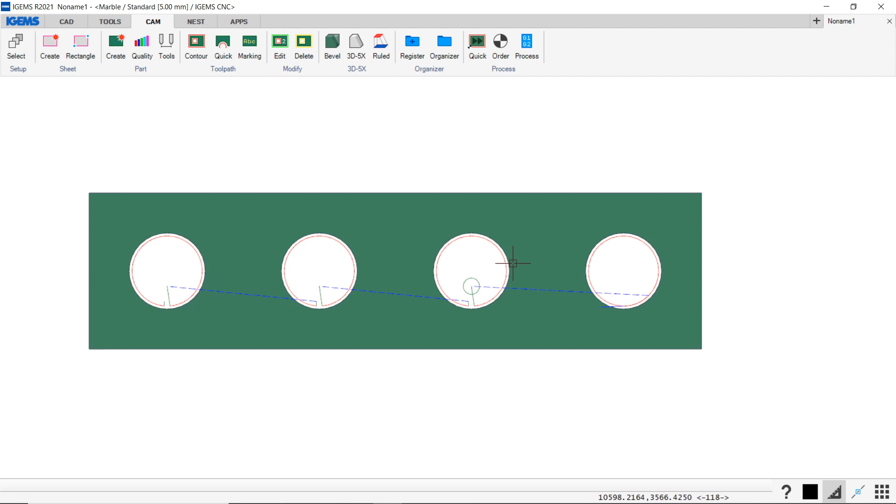So I think a good start is to make some piercings. We're gonna cut in this 25mm aluminum sheet, and I'm just gonna make some piercings right here to display to you what they look like. Before we start the machine, I just wanted to show you the part that we're gonna cut, and it's just 4 regular holes with 4 different piercings on them.

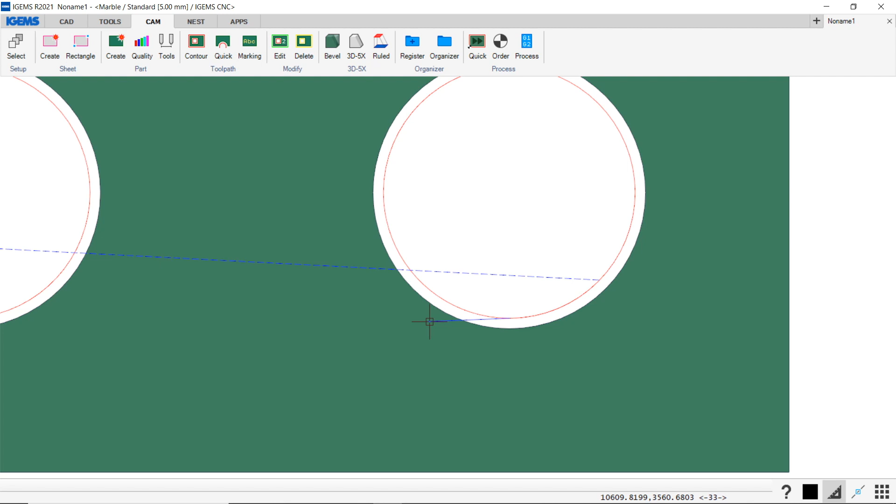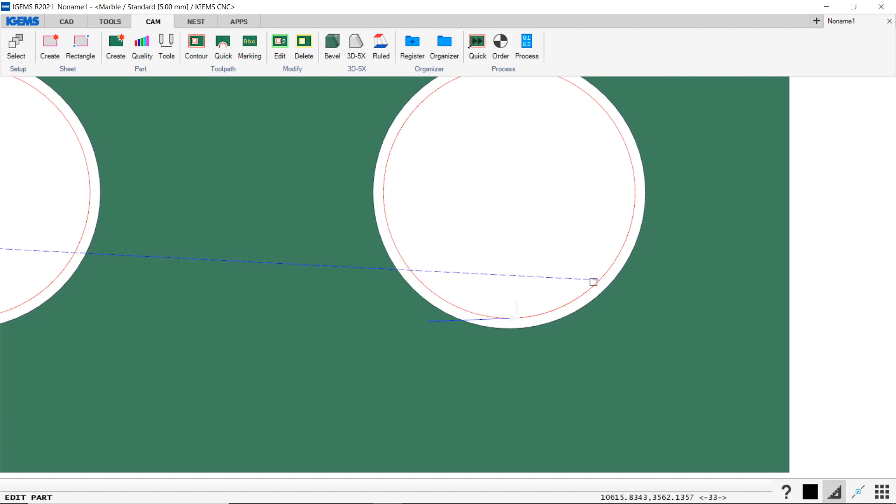And the first one is a blind lead, and the blind lead is used when we cannot fit another type of lead. So maybe it's a tiny hole, and it works like this. The machine goes here and it makes a movement towards the toolpath, and when it hits the toolpath, the jet and the abrasive is turned on, and it travels all the way around and comes here again, and then it will over travel. I think it's 12% of the thickness of the material. So that's this distance right here.

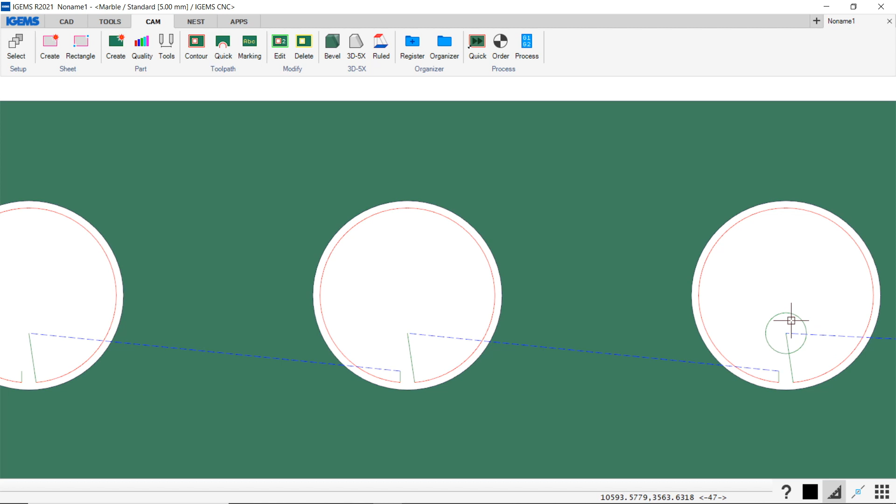The next lead, or the next piercing, is a circular piercing. So the machine will make a circular movement like this, and go in here and go around. And then we have a lead out here as well. Next piercing is a linear piercing. Start here, make a movement with abrasive and the jet on, and go around. So it's basically like a circular piercing but without the circular movement.

And last but not least, we have a stationary piercing, which I recommend you use as little as possible because it takes a lot of time. You will see that in the video. The machine goes here, opens the jet and opens the abrasive, and it will stand here till the jet is through the material. Then it will make a movement.

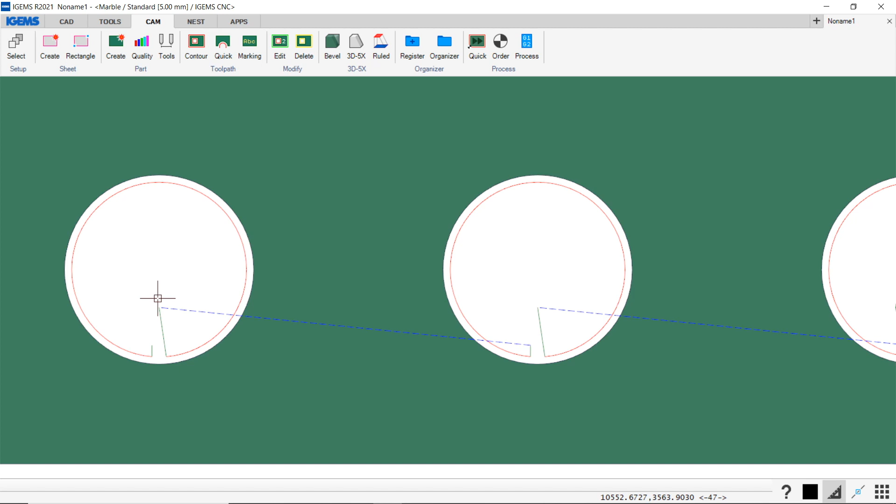And the reason for this being a bad piercing, if you can use another type of piercing that is, it's because it will just stand here, and all the water, all the abrasive that is going into this hole has nowhere to go, as opposed to a linear piercing where it travels, so it can backlash and make a way for the abrasive and water to escape. So that's why it takes a lot of time. I hope that makes sense. But let's look in the machine and see what this looks like.

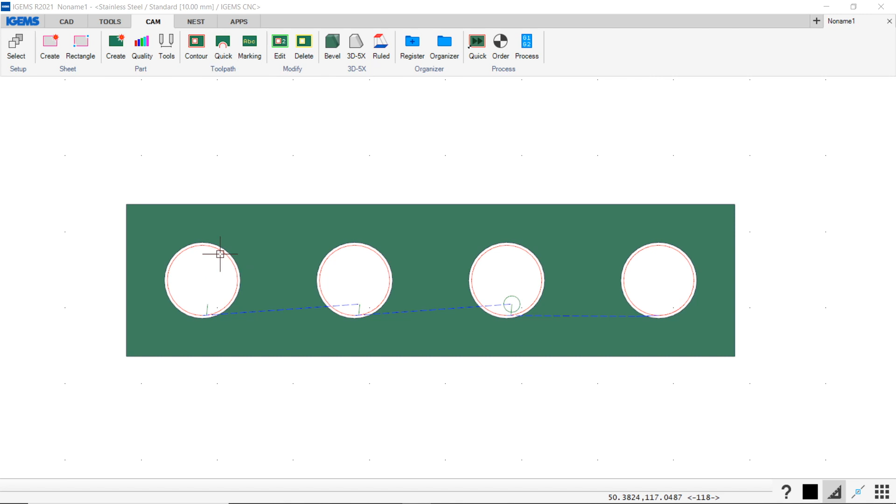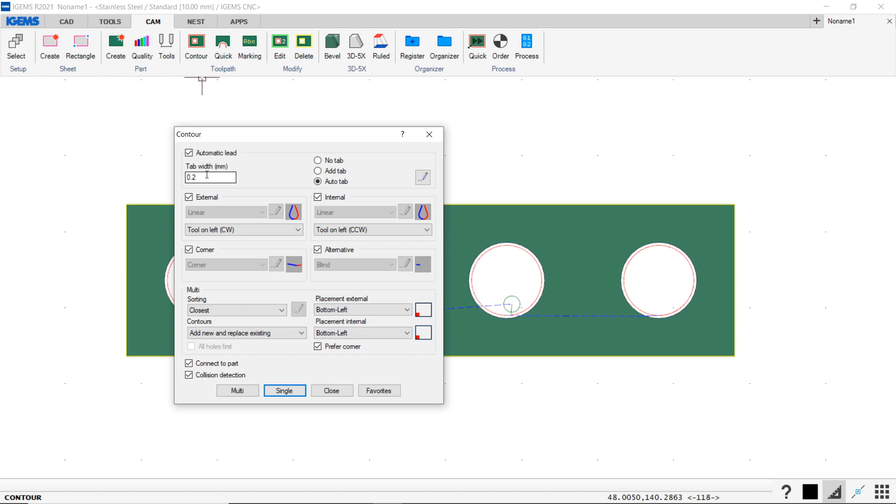Alright, so now you know what our piercings look like. Let's go into the contour and apply these to different types of leads. So I click on contour that's located under our CAM tab, and the first setting you will see is the automatic lead function. And this is a great feature. iGEMS is determining where to place the leads, or actually not where to place the leads, but what types of lead we are putting on the material. And these change for a lot of different materials and thicknesses.

So with this automatic lead, there's one function, and that is if you want to have tabs. A tab is a little bridge, so it will not cut all the way through. It will leave a little bit of a bridge here so that your material doesn't drop into the tank. And that's a good thing when you're cutting small parts, because that's a real pain in the ass when you cut a lot of parts and half of them are falling into the tank.

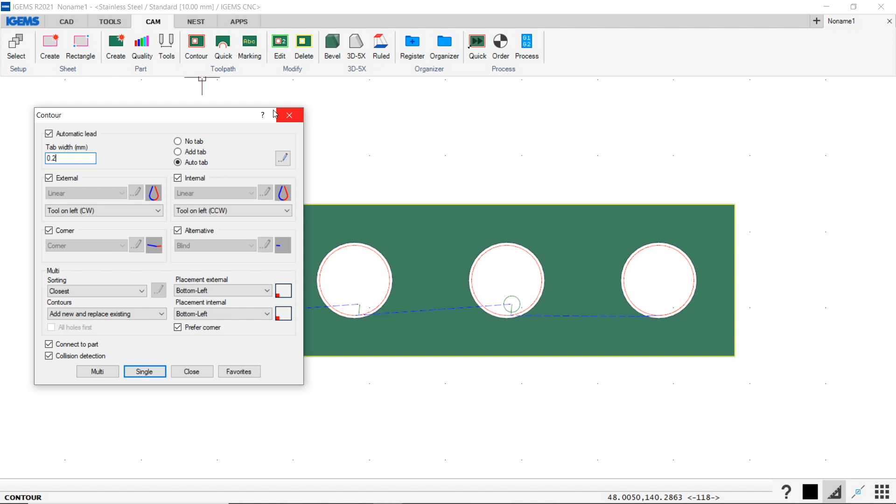So I've prepared this little thing here. So let's say this is your machine table, and your machine table's slots are located horizontally. So your machine table looks like this. And if it does, let me just draw some lines so you understand. So let's say this is your machine table.

Like that. All right, so this part is actually crossing two of the slots on your machine. So this will probably not fall into the tank. And this thing, it doesn't cross any of the supports in your tank. So if we cut all the way around here, this thing will drop into the tank, right?

So let's head into our automatic lead again. We've activated automatic lead, and we want to have an auto tab. So let's just look at these settings. We can set our lead length, 15% of the material thickness. That will almost definitely be enough. So now we can also say add tab on a small X size.

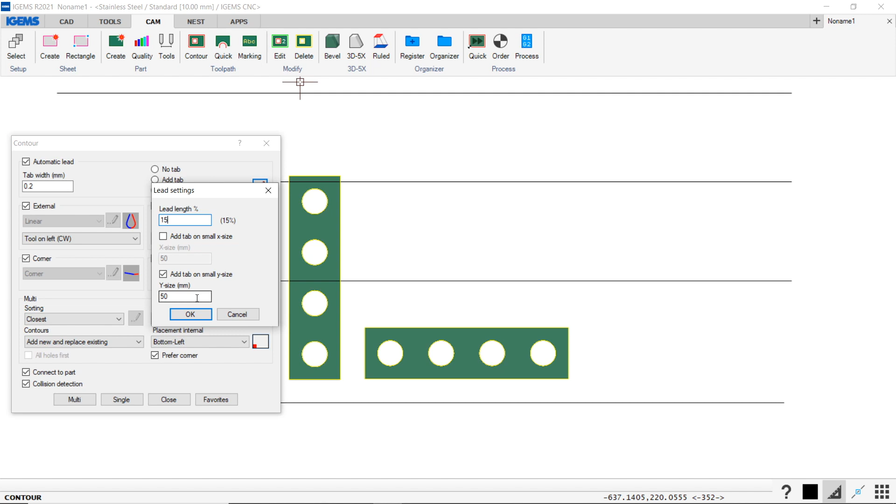And we don't want to add a tab on a small X size. So this is the X size. This already has two supports, right? So we don't have to cover the X size. We have to cover the Y size. So add tab on small Y size. Let's say it's 50 millimeters between here. Then we might want to add a little bit more here, but let's just look at this.

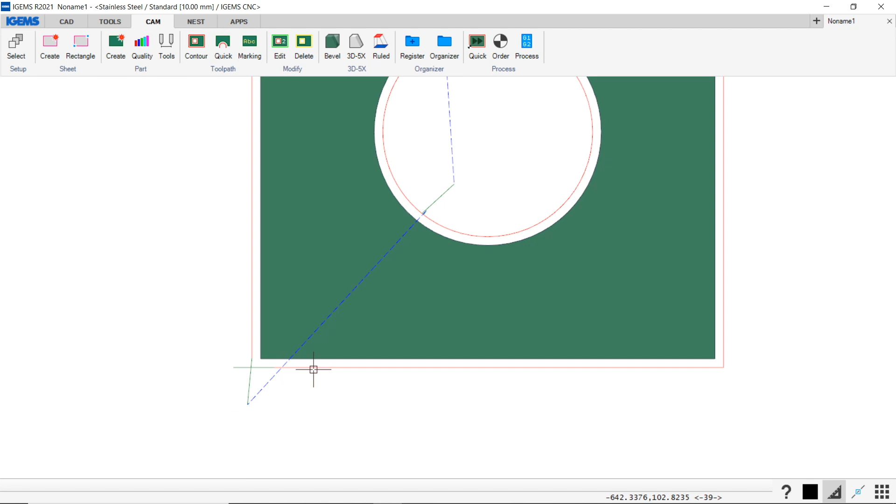All right, and set multi. Select these, enter. So in this corner, you see that we have a lead. Starts here, and it goes here and around, and then goes back here. So this cuts all the way around. But this lead is starting here, and it's coming out here. So that leaves a little bit of a tab here.

So it's the same part, but depending on the orientation of the part, we place our lead or our gap on the part. So this automatic lead is a great feature. I love to use it, but you can also set, I don't want to have any tab, or I want to have a tab on everything. And then it will have a tab with this value. So that's the automatic lead.

Let's uncheck this and explain something about this. So this box right here is the settings for our external leads. So that's the outer geometry. This is the internal, so that will be our holes. Our corner, so if this is checked, it will always look for corners on internal and external geometries. So it will place a corner lead. So this will have a higher priority than those two. And we also have an alternative which has got the lowest priority.

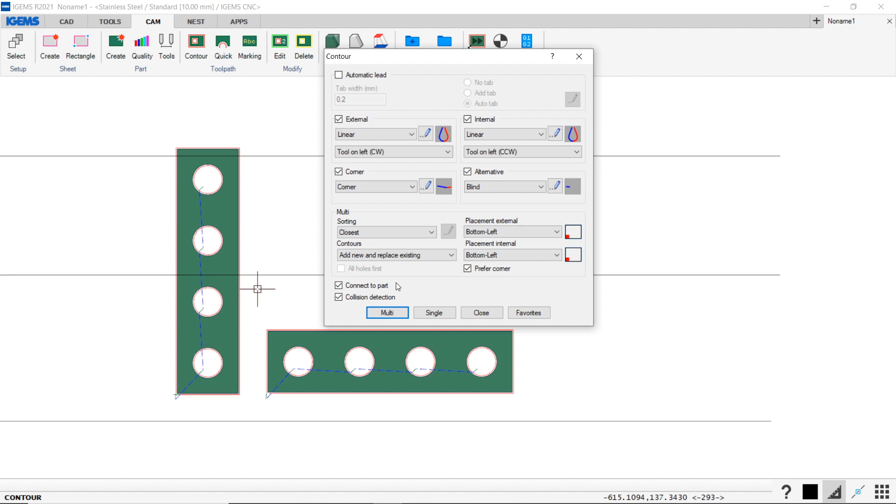So if I would select this and hit multi, it would add new and replace these things. So that will just redo the whole contour on this part. But you can also use only replace existing, only add new, or individual. So let's hit multi on this, enter, and that has placed my leads on this part. But you see, these leads are looking a little bit different because they have a radius on them, right?

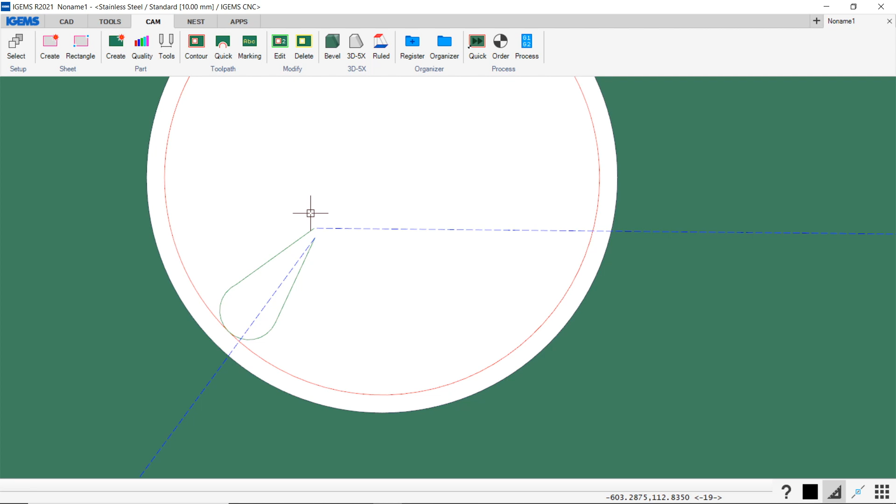So let's go into contour and look at that, because we can click on either the pen here or on this preview image, and that takes you to the same direction on any of these buttons. So I click on that and we have an updated lead editing area here. So on our left side, that's our leads right here. These are my leads. And this is a preview of the lead.

So let's look at, maybe we'll look at the linear, and we can change some, let's just change this to a negative overcut of 2 millimeters.

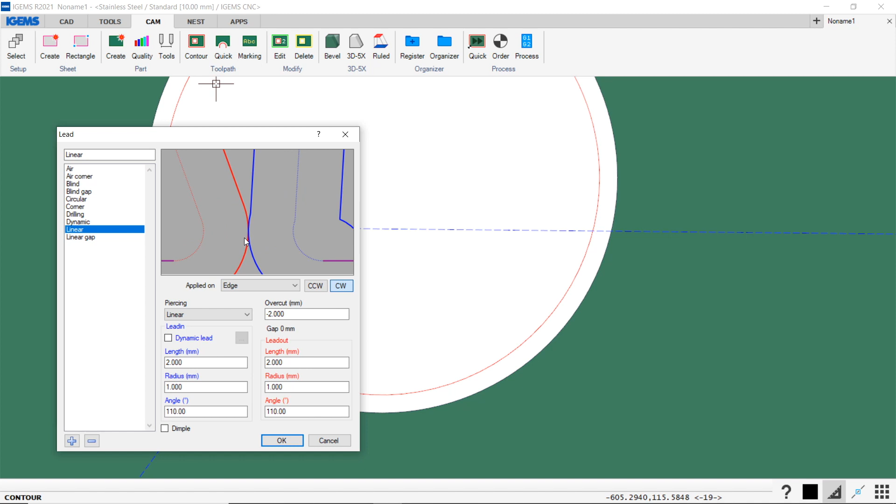So that will give you an idea. The toolpath is this dotted blue line. It goes here, and then goes around, and then comes back here. And this solid line is the outer area of the jet. So you will see that it will cut the part and it will probably fall in with a very big tab here, which is not super nice.

So let's change it back to 0. That will take it from here, go whoop, and then come back here, and then go up here. So this is a nice preview where you see what actually happens. And you can change, maybe you want to look at what does it look like on a corner, or a small hole, or a large hole. You can also change the direction, so if you want counterclockwise or clockwise.

So for each of my leads, I can assign piercings. So my linear lead will of course have a linear piercing, but you can change. Let's say we make a new one here, which is called aluminum 5mm outer. All right, so for my aluminum 5mm outer, I want to have a circular piercing, and I want to have a length of 4 millimeters, or actually I want a dynamic lead. So this will make the lead in length dynamic. So it's from 3 millimeters to 8 millimeters.

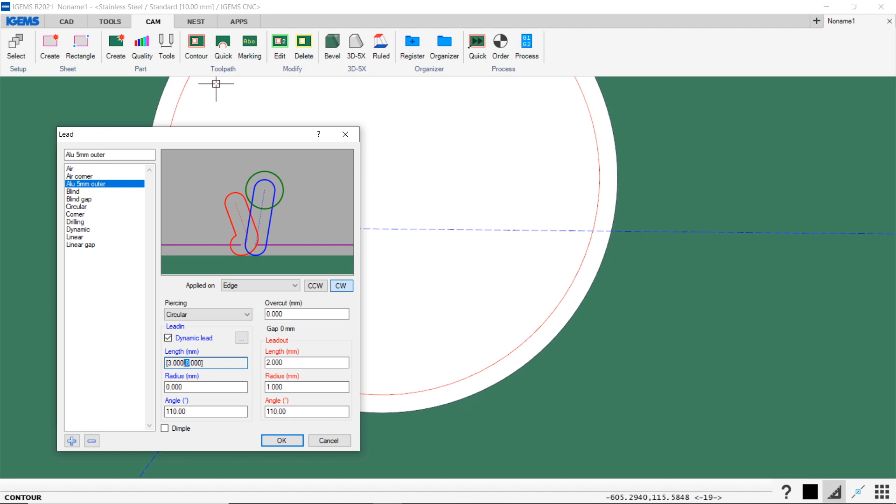Maybe I don't want a radius on this, so I'll change that. And the angle should be maybe 30 degrees. So it will come in a low angle and continue this way. And all these are for the lead out. I think you get those. So I hope this makes sense, this dialog box. These are our types of leads, and to those leads you can assign different types of piercings.

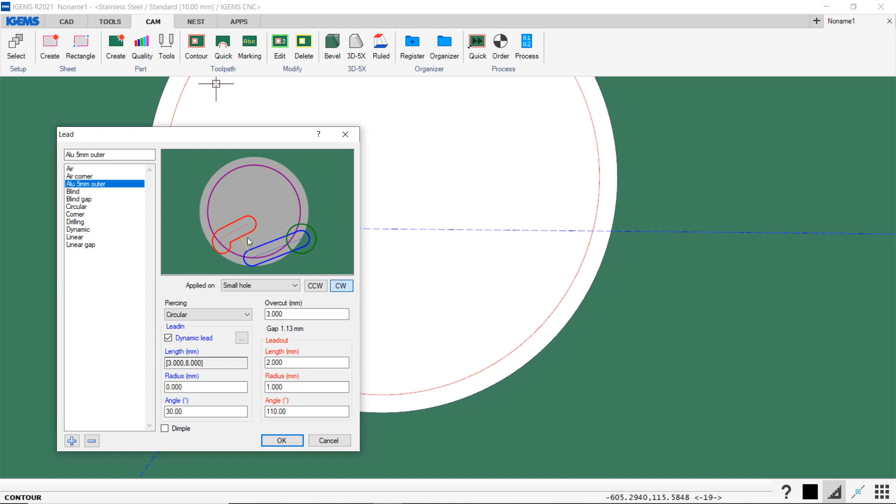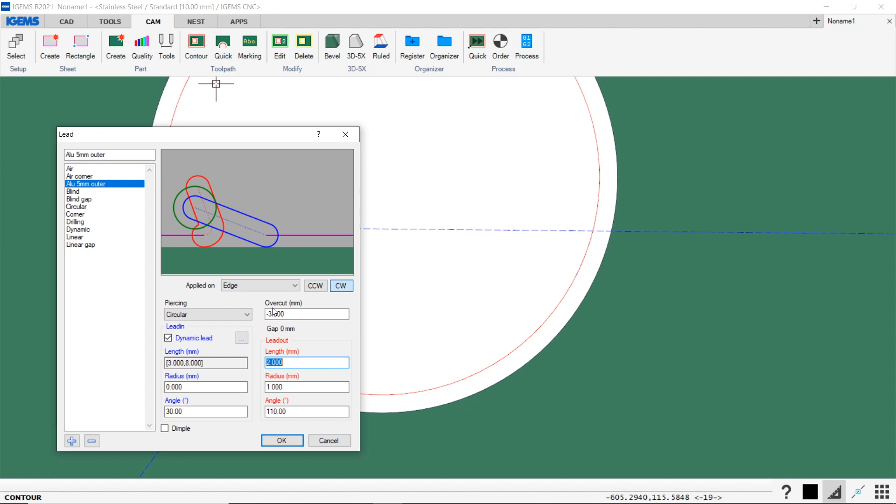And also you can use the overcut. So maybe I want to have a 3mm overcut. That will cut here, go all the way around the part, come back to this point, and then continue for 3mm. So that's overcut. But you can set a negative overcut as well, and that will leave a gap of 3mm. But actually it will cut, as you see here. So it will fall down anyway. So let's just remove this.

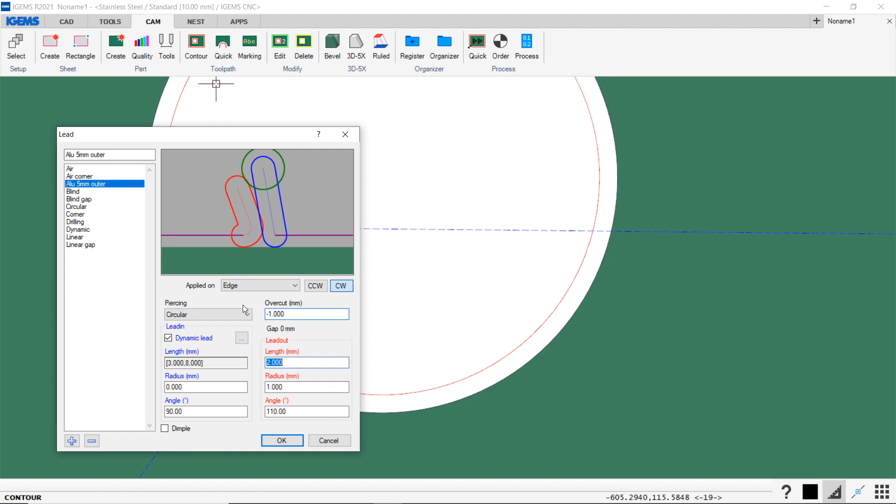Oh, there's one more thing. If you're a welder, you know that this... set 0, all right, set -1. Yeah, so if we would have this piercing, the material, so this green is the material, it would still have this little tab here, right? And that's a real pain in the ass if you want to weld this material to another, because then you will have like a tab here, and then the opposing side might also have a tab. You want them to be flush together.

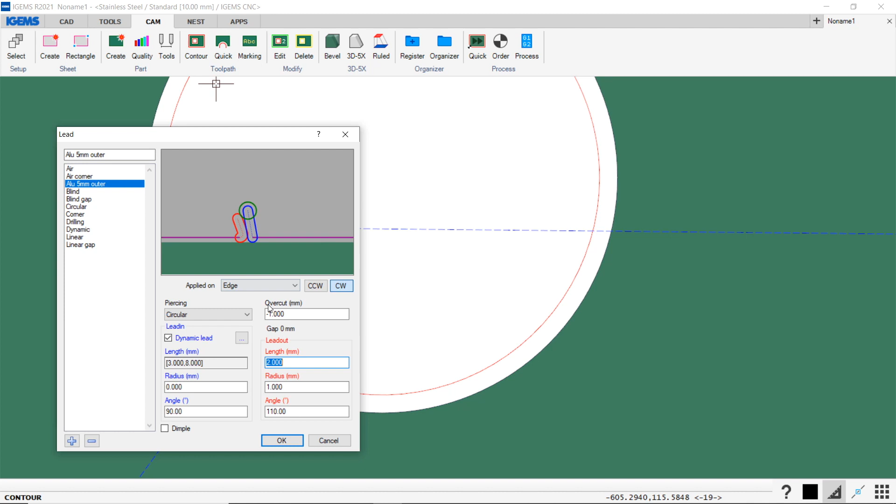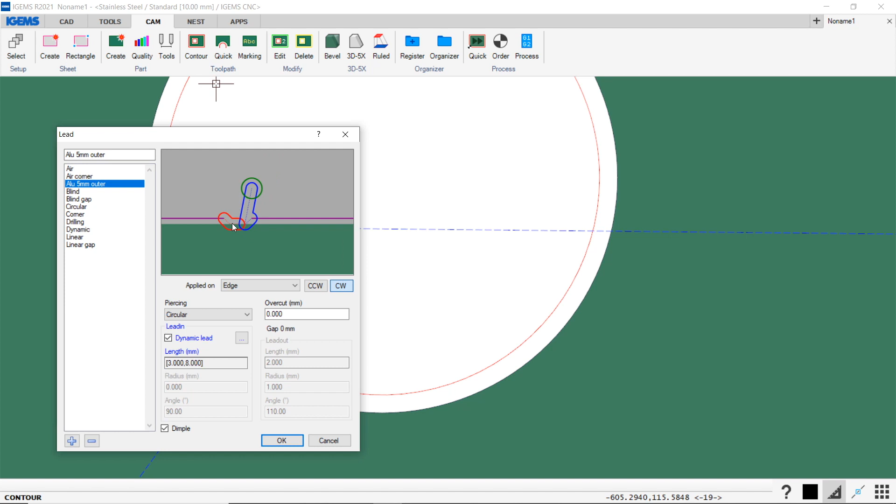So you can set a dimple. And that means, let's change the overcut to 0 again, it will cut down into the material like this. So we will absolutely not have a tab. And that might give you a couple of minutes away from the grinder. So that's that. Let's remove this. Cancel.

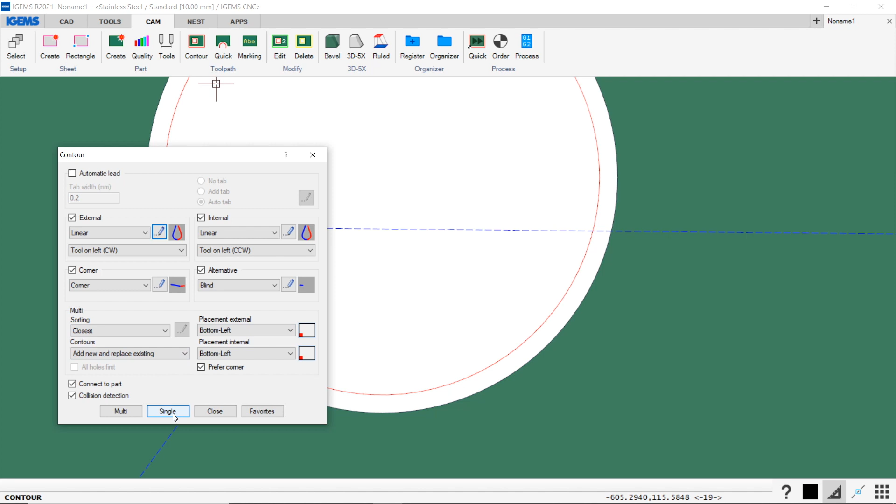Yeah, I guess that's it. You can use multi, as I said. Then you have to select a part. If you select single, you can put it wherever you want. So you can just click wherever you want, like this. And of course, you can right click and use the snap functions. You see it changes from here's an external and here's a corner.

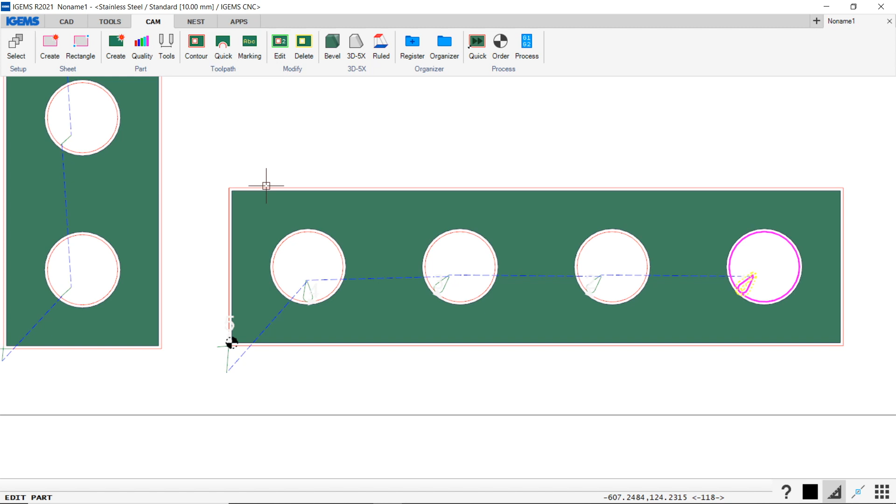And there's also 2 more things I want to show you. Edit. If I click on this and on this part, we can edit this part. So here's the cut order, and that will highlight all of these. And you can put in a stop if you want to. You can change the direction or change the order of them. You can change the values of the lead, type of piercing. You can also sort them again if you want to.

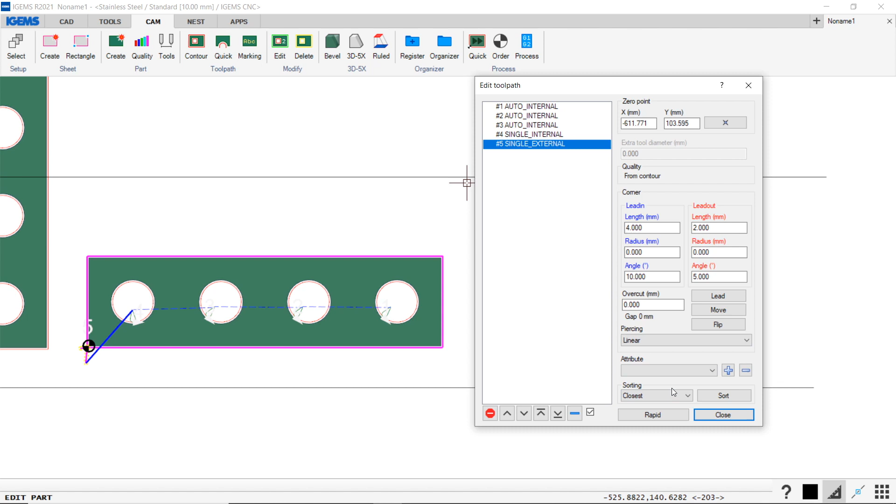And the last thing is delete. So if you only want to delete the toolpath, you click on delete. You select the part or select the toolpaths and done or enter. That will remove them. So that's it, guys and girls, for toolpaths and leads.